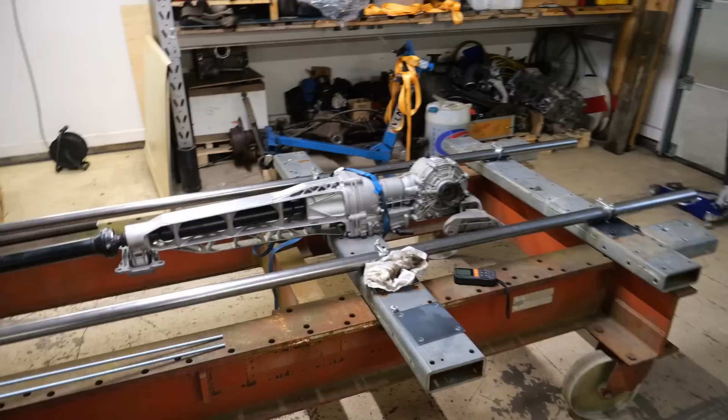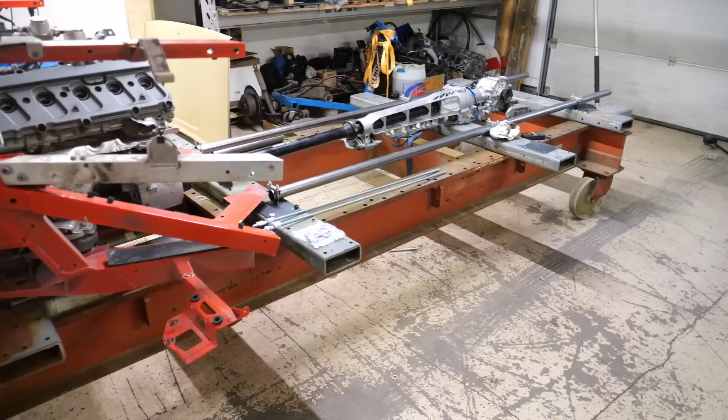Hello and welcome to video number 2 of my new project, my street race car that I'm building with this mid-engine V10 and this body, the Volvo 244, and I have started with a chassis. The chassis will be built of all these tubes.

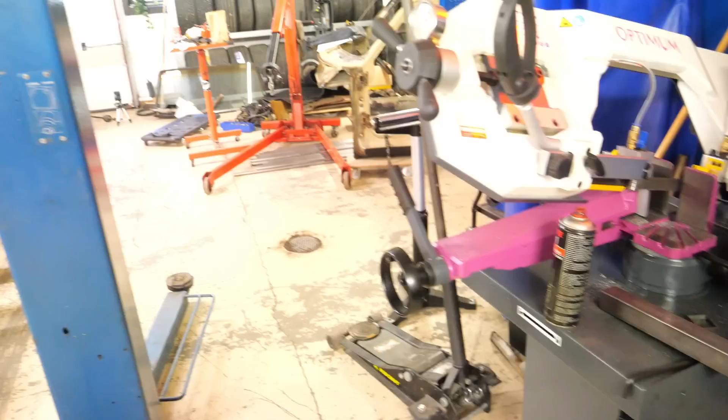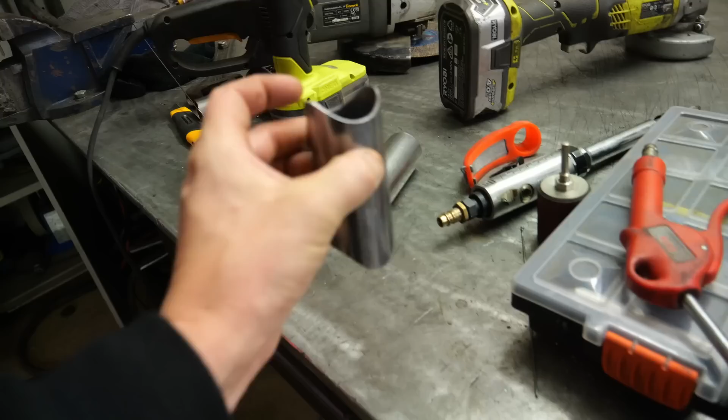First is to get some equipment to build this car. I have actually never built a chassis car before, so I bought these. This is actually for my coming CNC machine to cut some stock, but this one is great for cutting the tubes as well. I also need a tube notcher, so I put this one in here and made a bracket for the tubes. We'll need to make this a little bit stronger, but this one works good to make some tube notches, I think so.

Also, I'm doing some welding here, testing. I need to send some samples for approval before I get approved to weld my own chassis. This one is going to have an SFI 25.2 tag, so I need to have that to be running a little bit faster.

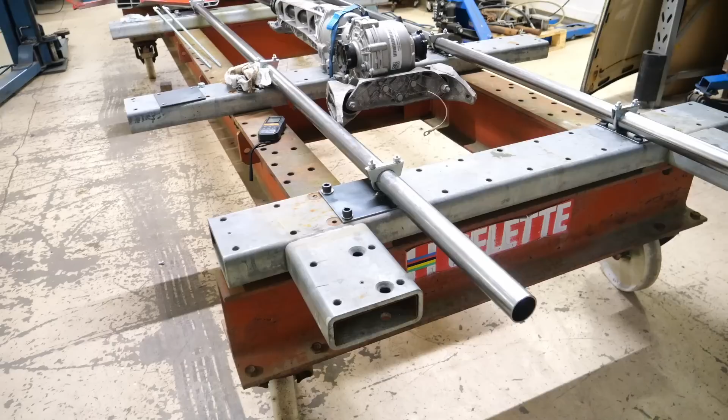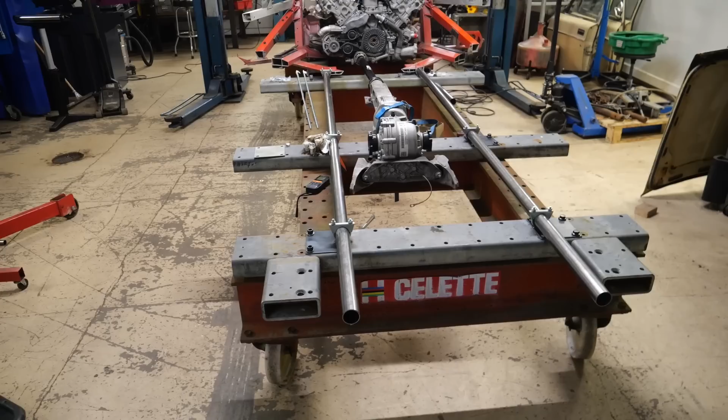Also here you can see one kind of chassis jig. It's actually not a chassis jig, it's a bench where you straighten out crashed cars. It's a little bit old, a little bit rusty, but I think this one is really heavy duty and it's straight, so it's a good thing to build the chassis on, I think. Also some wheels, so I can move it around in the shop and put the body on top of it as well. You also get a better working position when it's up from the floor a bit.

So I'm not exactly sure how to build a chassis like this, but I'm trying it out and have a bit of help from some friends as well. But I have no help from a real chassis builder, so we are all newbies on this one. But I hope this will work good.

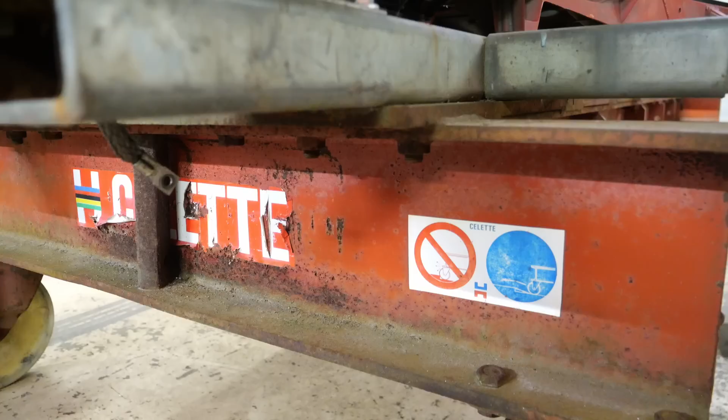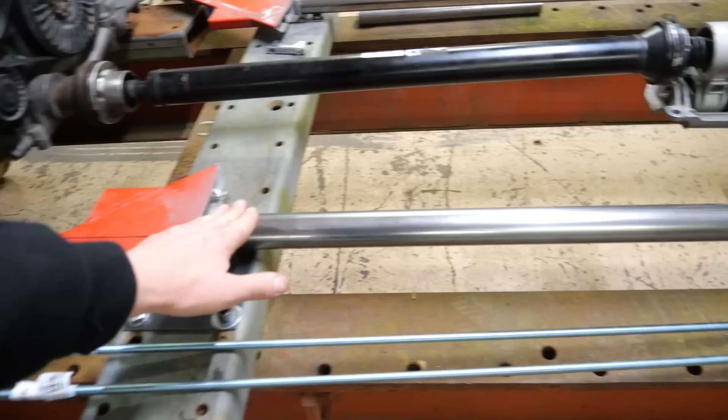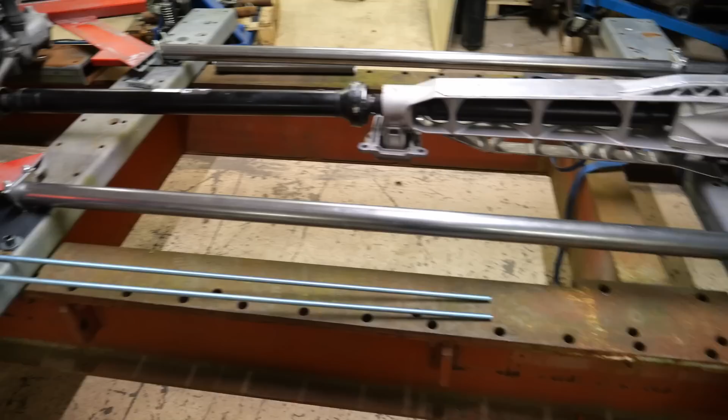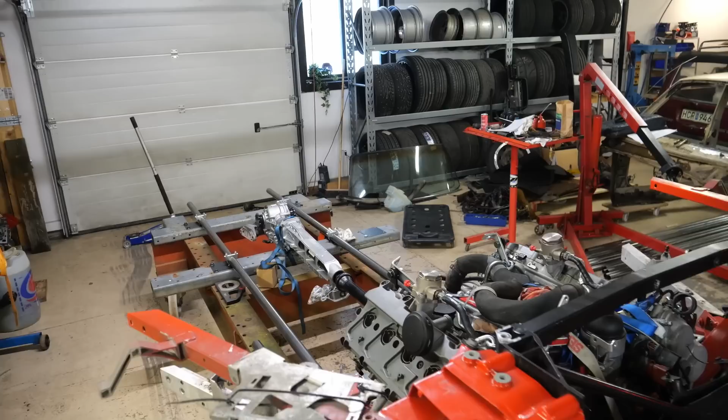I have started by bolting the rear clip of the car to this frame, so this one is straight and will be stable, and putting in these inner frame rails. It will be pretty wide between these because I'm gonna put the front suspension on these ones, and I have these straight all the way. So I started making some brackets here. Now I will cut a bit in the aluminum as well. There is some progress here. There will be a lot of grinding, welding and measurements to get this straight. So we'll see if we can build a car out of this.

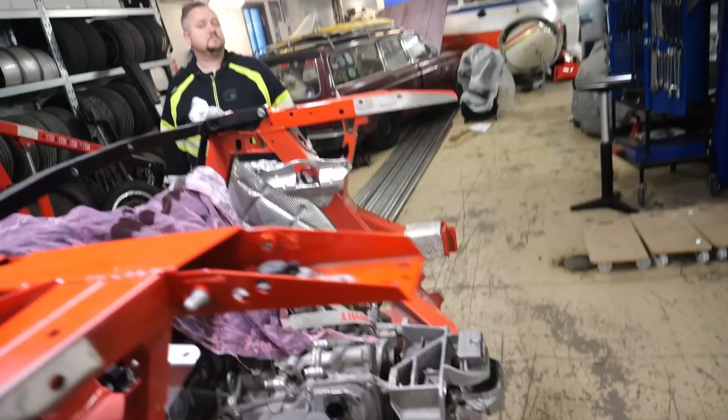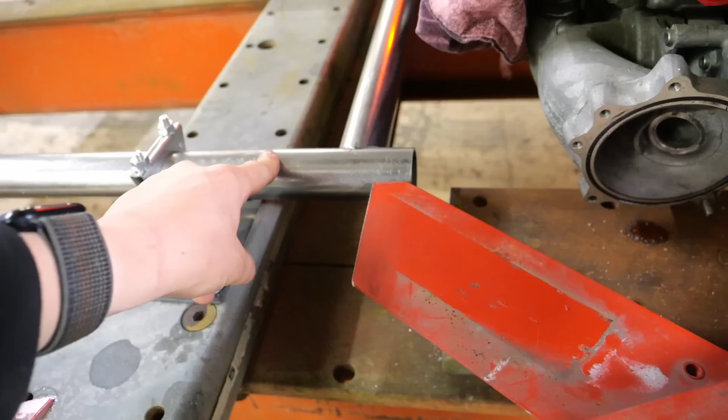Now it's a bit interesting. We're gonna see how big the driver compartment is gonna be. And to see that, we need to put the chassis on, I think. So I'm gonna see if it could fit over here. I made some tubes here holding the inner frame rails. So should we pull it back? I also need to figure out how to make some mounts between these steel tubes and the Audi R8 aluminium frame back here. But I think we're gonna lower it down and see.

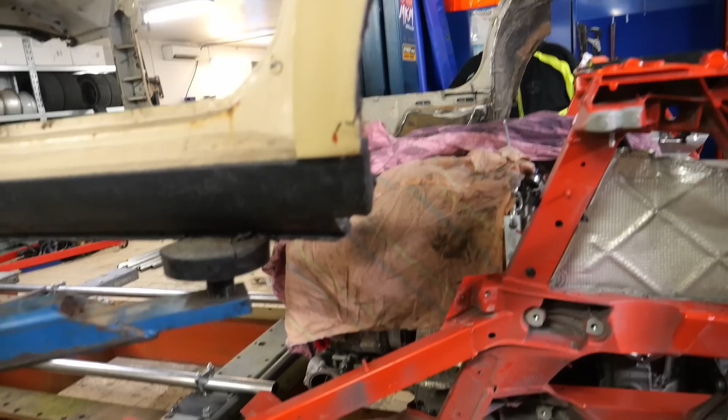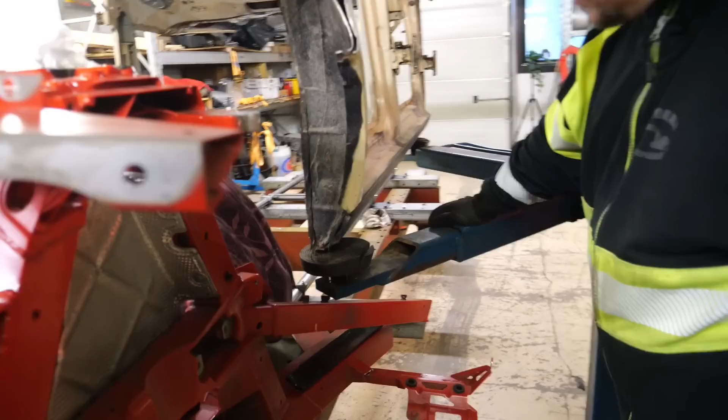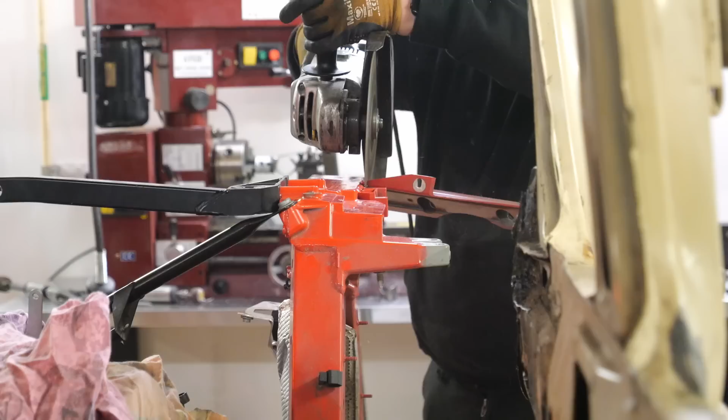I think we maybe need to cut out some here. Interference? Yes, we need to cut some. This aluminium structure is a little bit too wide in some places, so I will cut this one here and a couple of places here. Testing out the seating position here to get the tubes correct, but I think this will be good.

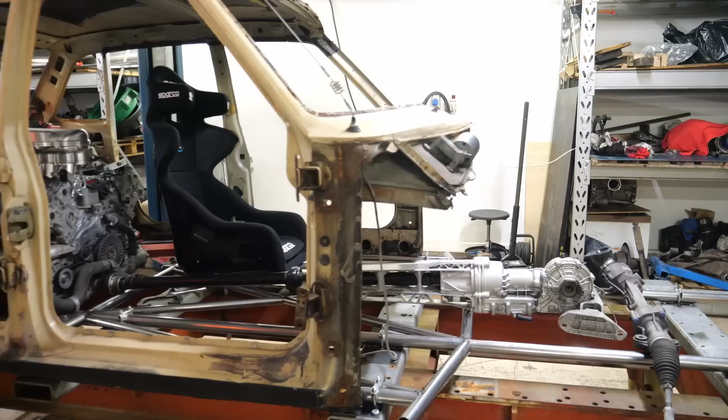There has been some progress with the floor of the chassis, and I think most of the floor is done, at least the required tubes. There will be some more for seats, for example, and maybe some other brackets for the front differential as well.

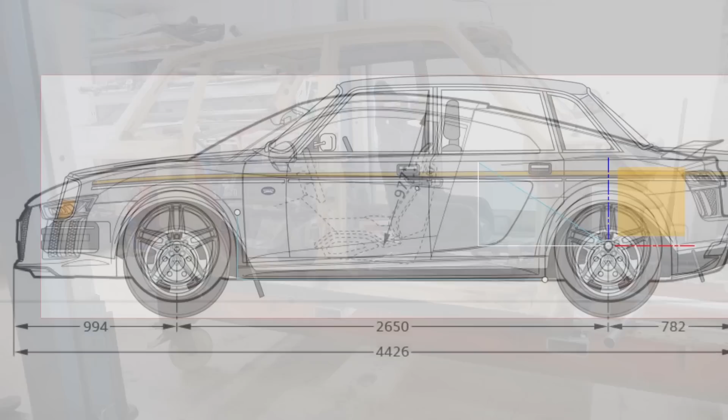And by the way, one cool thing about why I chose the Volvo 240 is that the wheelbase of a Volvo 240 and, for example, an Audi R8 is 1 millimeter of difference. It's 2650 and 2649 millimeters, so it's almost identical. The bad thing is that the track width is a bit different. The Lamborghini Huracan is 200 millimeters wider than the Volvo, so this car will be wider than the Volvo, with wider fenders.

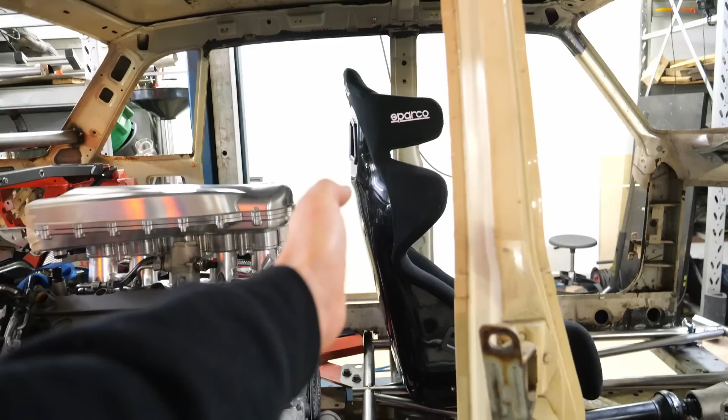Next step, I think, is to make the main hoop, and I'm gonna lean it 10 degrees backwards. You can also see I have started with some brackets holding this aluminum together with the Audi R8 frame, and here it's a bit tight for the drive shaft in the front. So the main hoop will go up there, and I need to have at least 1 inch above my helmet.

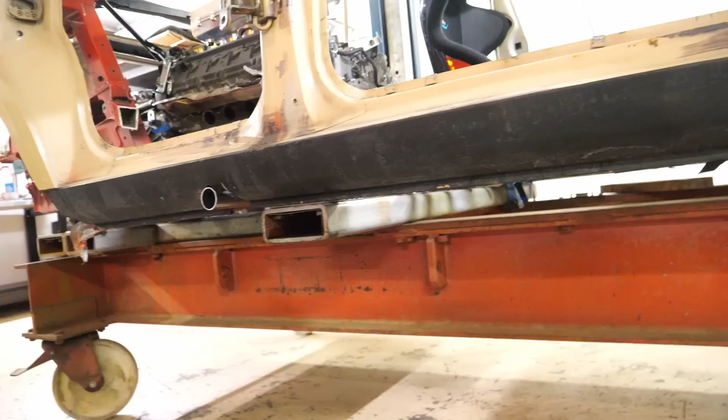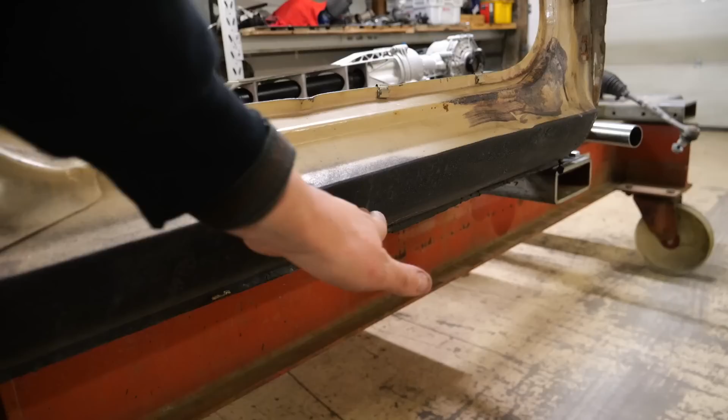So I will try to do it as low as possible, the roll cage there, so hopefully I can bring the chassis down a bit. Right now it's standing here on the rockers, and yeah, hopefully I can cut a bit of them and make it lower. We'll see, to save weight and to make it a little bit more aerodynamic. Maybe it will not be that good looking if cutting off some of these rockers, but I don't know. This one is not going to be a show car.

When building a chassis like this, you need to have these forward bars. It will also be the windshield bar forward of your feet. Also the bar coming from the roof needs to be forward of the most forward part of your feet. So you have to do it a little bit different than many, like 240 roll cages. Usually they go down just here, but then your feet will be forward of it.

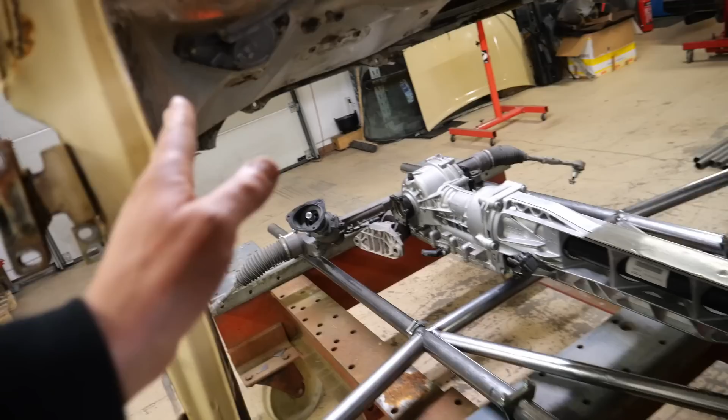And because I do not have any crash structure from the original car, I need to have these tubes forward here. But I think this is gonna be a good seating position, and it will be good room for your feet. But maybe I need to cut out here to make this windshield beam a little bit forward and low there. The tubes here are also tack welded, so I will need to do the complete welding of the chassis in the future.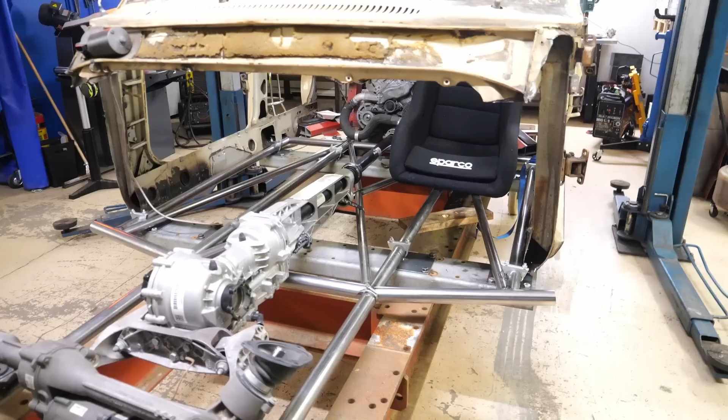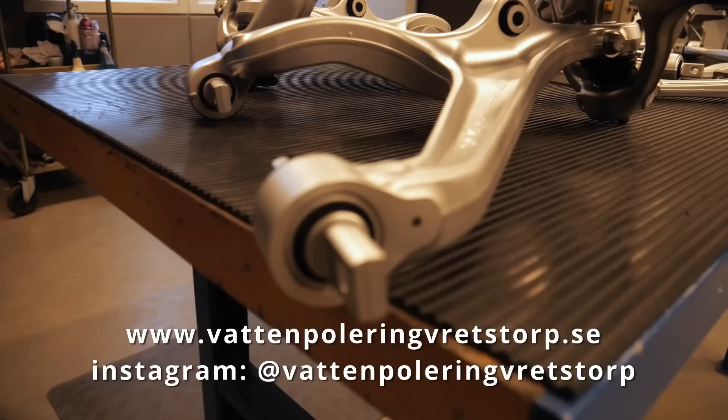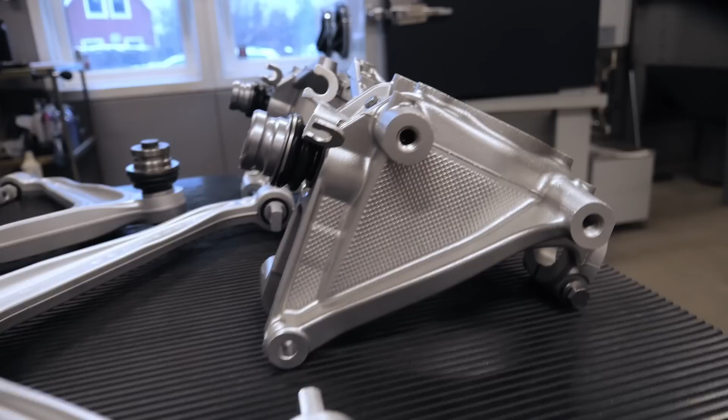I'm here at Vattenpolering Vretstorp picking up some pieces for my build, and yeah, they look like brand new pieces, but these are actually a couple of years old and were very corroded, rusty before, and now they're looking like brand new. So these are, I think, water polished, water honed here, aqua blast. So this will be very nice to install on the car.

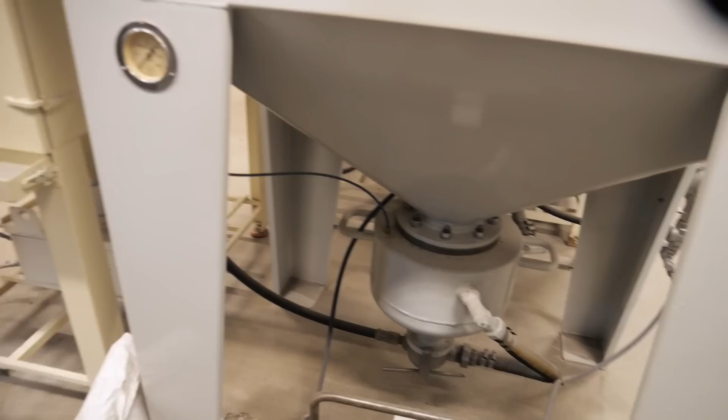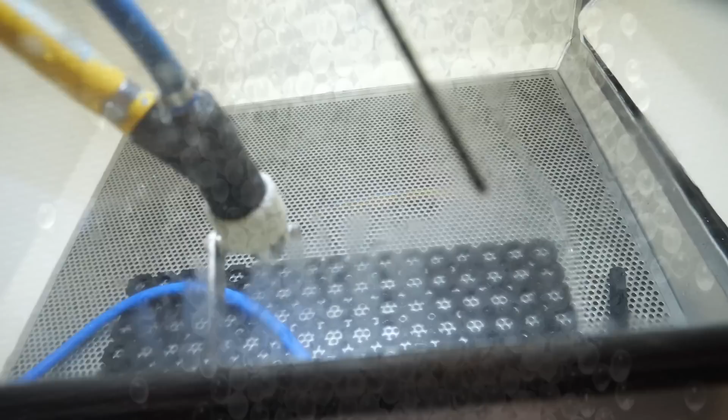They have a couple of different blasting machines here. Some old ones that are renovated, and vapor blast, this one. I think this has been in a mine here in Sweden. Some different sizes. But I think this is the one that makes the nicest finish. It is using water and small glass beads, coming out of this nozzle together with the water, with high pressure. Yeah, beautiful, will be nice.

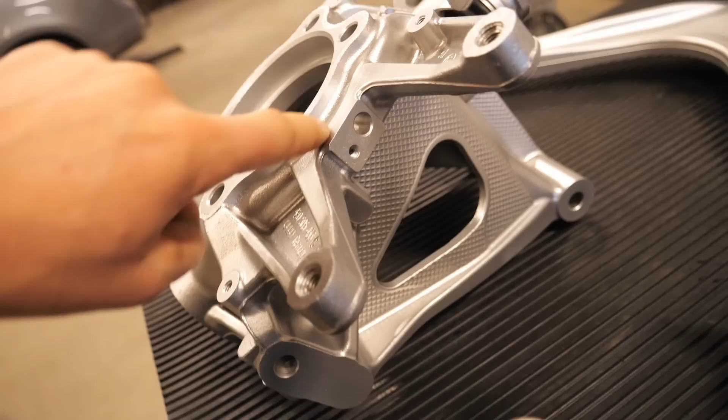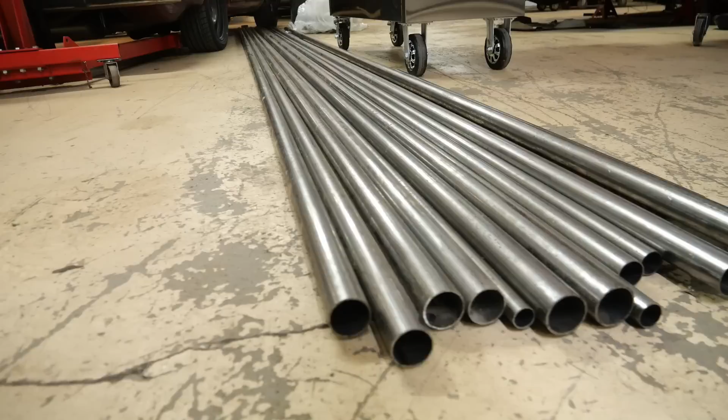Here goes the sensor for the wheel speed. And you can see that there are some different dimensions of tubes in this chassis. And I have some different dimensions here of the tube I bought. And I want to make it as lightweight as possible. So you can actually build your whole chassis in 1 5/8, it's like 41.3 millimeter tubes. If we check a little bit of the specifications, what I'm building this car for, it's the SFI

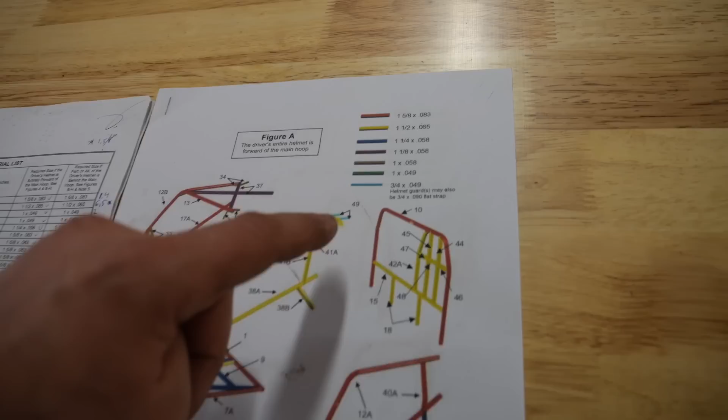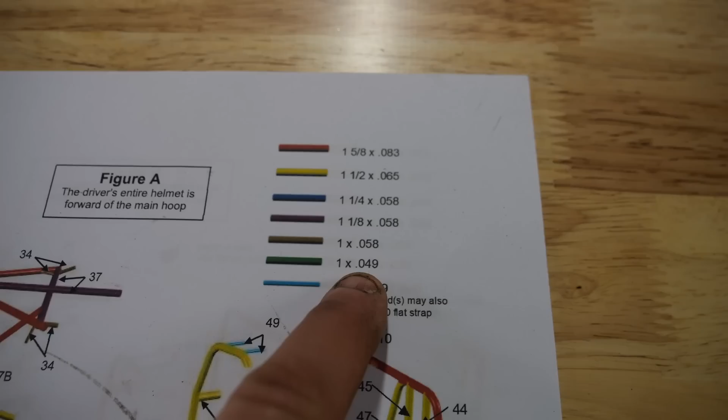25.2D specification. In this one there's a lot of text, a material list and some pictures with different colors. The colors represent different dimensions of tubes, and it's actually 7 different tubes for building a car like this, if you want to make it as lightweight as possible, but I think I have 6 different, and there's also 1 inch, for example 2 different thicknesses of the tubes. And there are many different variants, 4 main variants, and I'm building after this one, figure A.

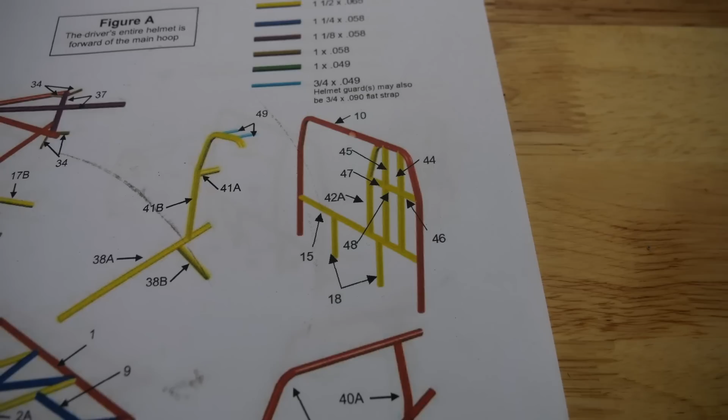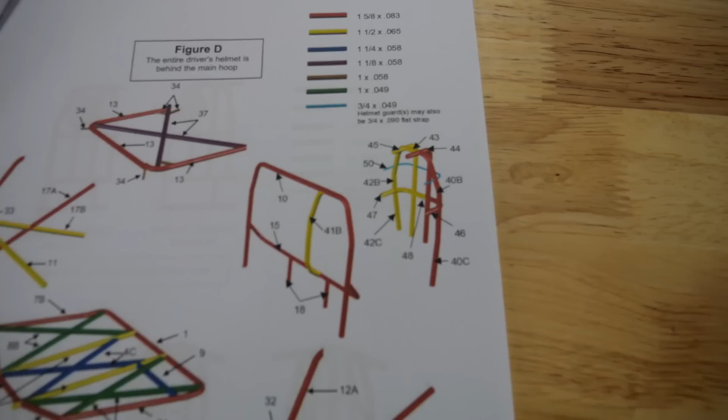Then your helmet needs to be forward of the main hoop. If we check, for example, B here, the head is a little bit aft, and then even further back. And this one, your head is almost completely aft of the main hoop, the funny car cage. Also, you can see in the floor you can do different configurations. So you have some different pictures and variants. I'm actually also building it like this.

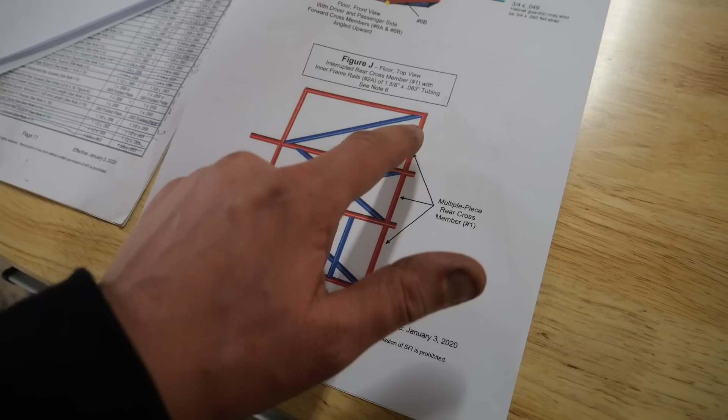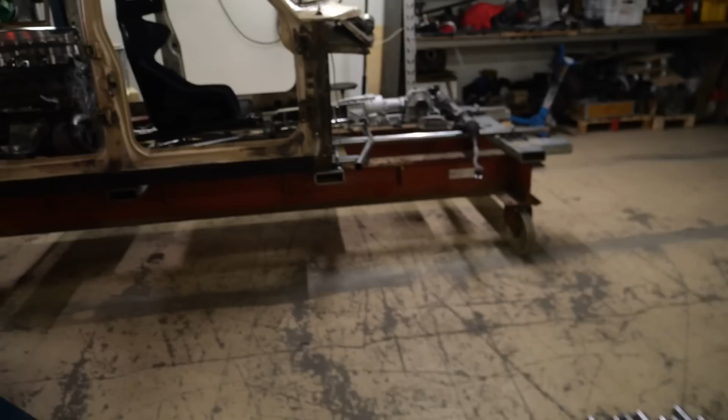Usually these 2A ones do not need to be 1 5/8, but if you make this rear member number 1 in 3 pieces like I have done, you need to make these in 1 5/8 as well. Usually number 1 is a straight one, and then you can make the 2A's in 1.5 inch, but I opted to make them long ones, the inner frame rails, because I'm not going to have an upper frame rail or dual frame rail, I think they call it, and I will only use these ones.

And I have them going out here and on this side. I was thinking to put maybe fuel lines in these ones, maybe some wiring and stuff. I do not want to have fuel lines inside the car, and there will actually be no room under the car, because I plan to make it completely flat under the car.

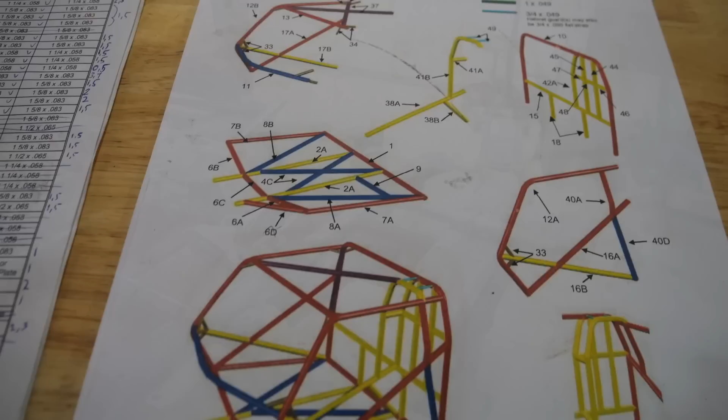So some fuel lines inside the tube here, and maybe take it out somewhere here in the front to the fuel cell that will be in the front here. And when building this, it's pretty good that all the tubes here have numbers.

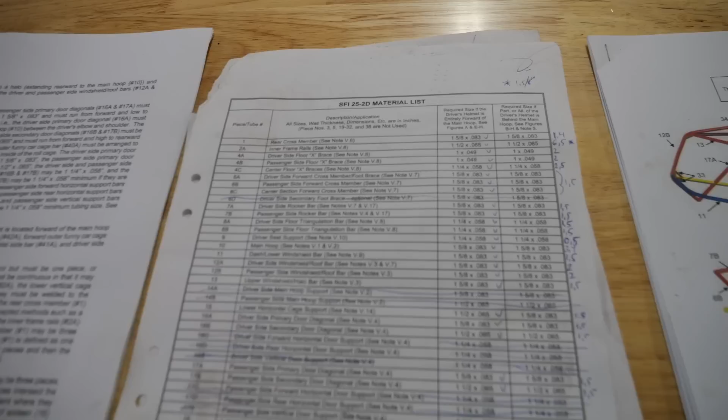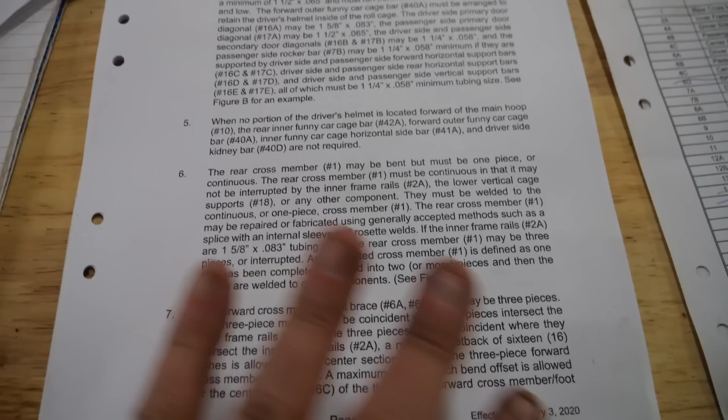So if we check number 1, for example, that we started with, in this material list we have all of the tubes. It's a second page as well, so it's many tubes. Rear cross member, and here we have the dimension of it, and it also says see note number V6. And then we check in the papers with the notes, and we have to read number 6 here and see if we can do something different, or so we comply with the rules.

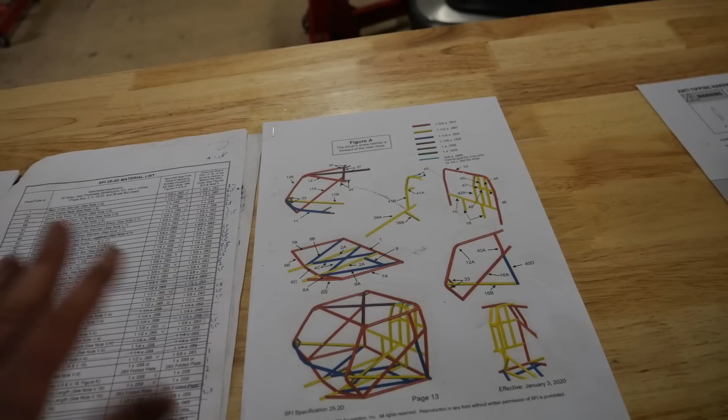It's pretty well laid out, these specifications. There are some places that are a little bit tricky to know how to do, but I'm trying to get some help from some guys that have built chassis before.

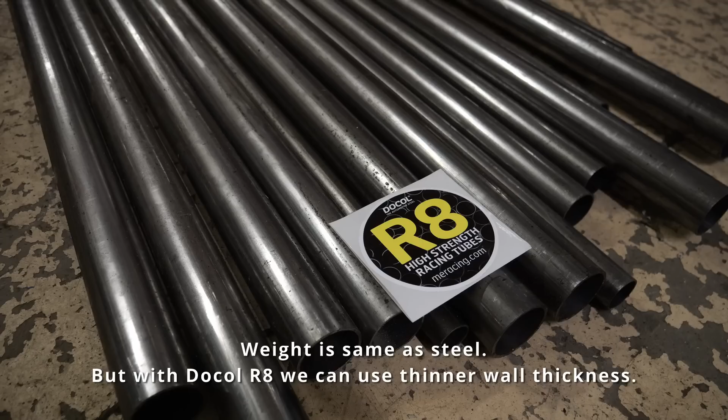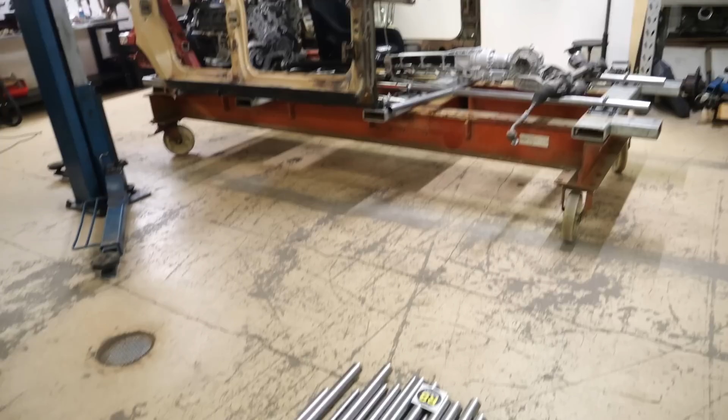Also, I can talk a bit about the material that I'm using, and it's the Docol R8 from SSAB here in Sweden. So these are Swedish made tubes, and they are really good. These ones feel really lightweight compared to normal tubes for roll cages. The normal material to build chassis of is chromoly, 4130 chromoly, and these ones are in the same dimensions as chromoly, and they are very strong, so they are actually thinner than mild steel ones.

And when building a chassis like this one that is approved to go below 7.50, mild steel is not allowed. It has to be chromoly or this Docol R8. But one advantage of Docol R8 instead of chromoly is that the thickness is much better all around. I think less than 1% difference anywhere here. I think the chromoly can be 10% different in thickness from one side to the other.

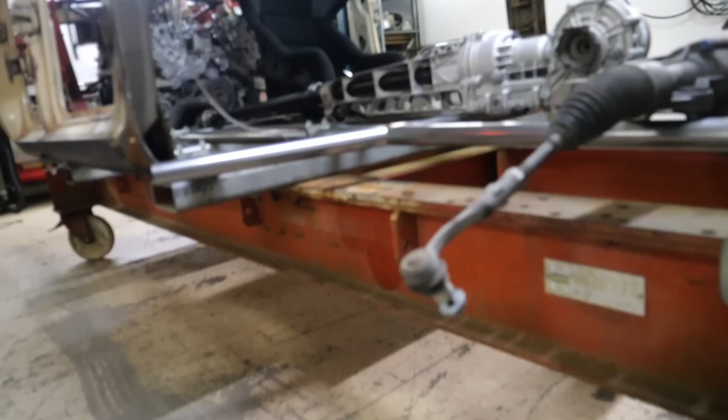So some chassis with chromoly are not that good if you're unlucky with how you lay out the tubes. So there can be some strange flex maybe in the chassis. Also, these ones have a higher tensile strength and yield strength than chromoly. When welding chromoly, it's getting really hard next to the welds, so it could be possible to crack. This one is not getting harder, it's actually getting a little bit, I think, softer, but that's usually not the problem. But you have to be careful when welding, not putting too much heat into the tubes.

And this Docol R8 is a material that has been around for many years as steel for crash structures in normal cars, but making these tubes has only been a couple of years, not as long as chromoly 4130, which is from the Second World War. And one thing about these ones is that they are not seamless. There is a weld on these ones, so they are actually made from one sheet, and that's why they can make them so exact in thickness all around.

But it is welded. But even though it is welded, these ones are really good, and I think better than chromoly. And more people are starting to use these ones, even in the US, even though these are made in Sweden, in Borlänge, not so far away from where I live. And more and more guys in the US are using these in chassis for drag racing and for different, I thought it was corrosion, but it's just dirt, some different kinds of cars there.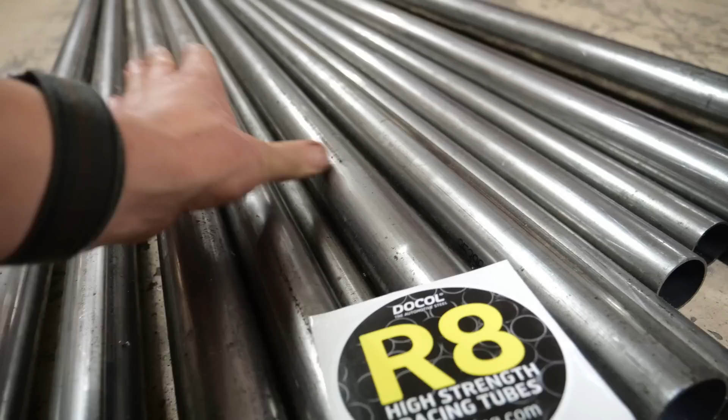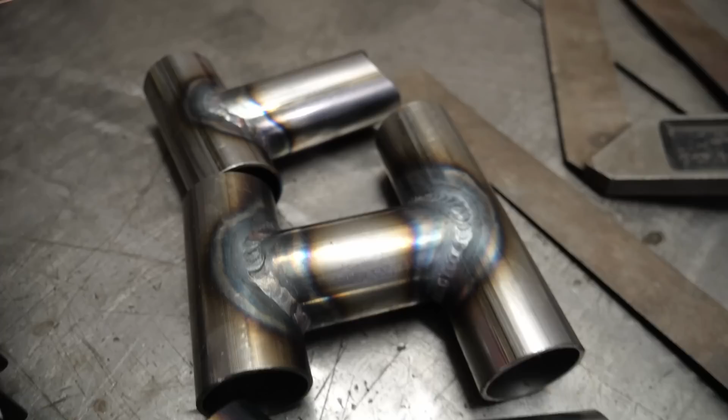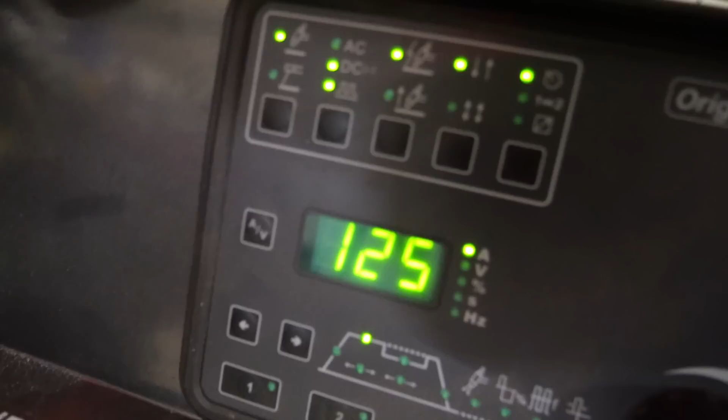I have also done some different practice welds here to send in for approval. So it's a little bit tricky to make it really nice, I think. It is not that hard to weld it, but to get a show finish on the welds is not that easy, at least for me. Trying out some different settings here on the ESAB, and I'm going with the pulse settings there. I think that is a good one to not put too much heat into the tubes.

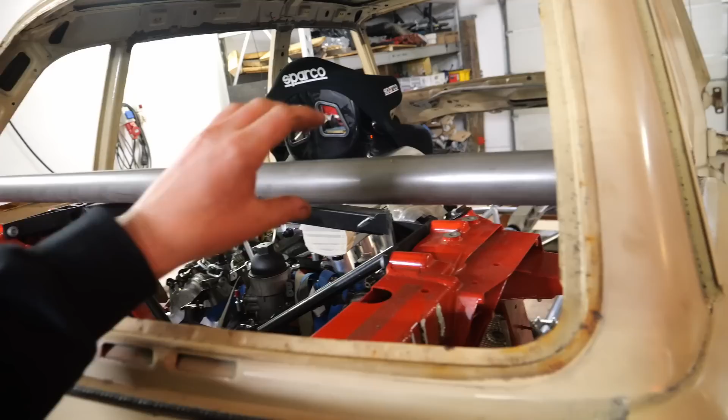Also have been cutting out and putting in a bit of reinforcement. This one will not be here in the end.

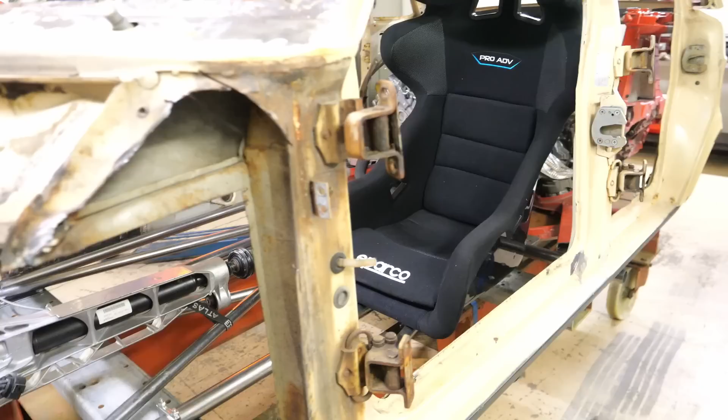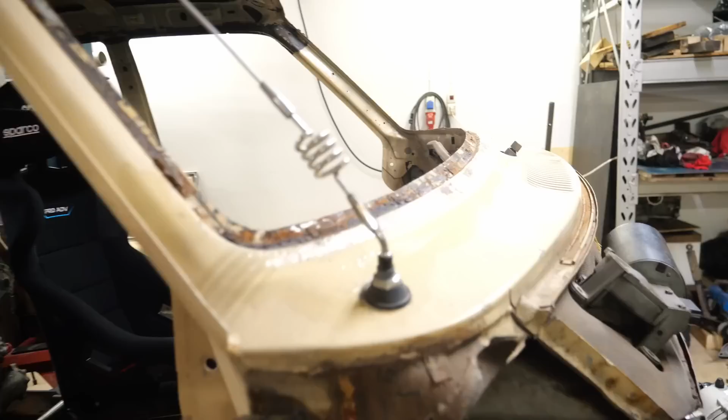And by the way, thank you so much for all of the comments about the name of this car. What should I name this car? I don't know really, hard to decide. I think Rörbritt, someone said, could be cool. This is called Rör in Swedish, and Britt is an old lady name. Rörbritt, could it be something? I don't know. Maybe something better with the engine or something, but we'll see. I'm still thinking about it.